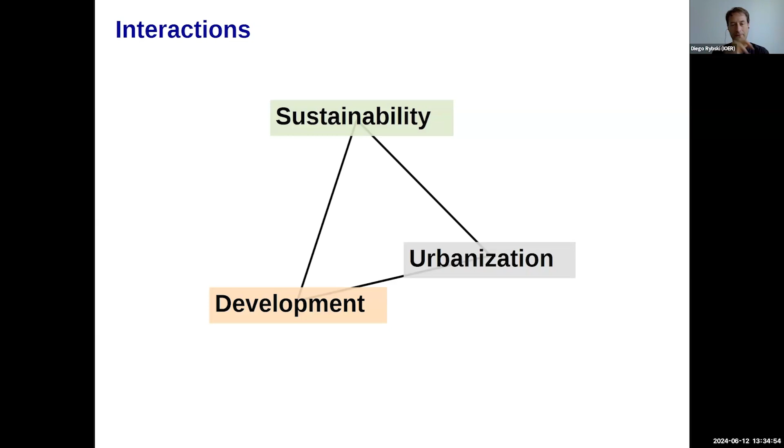Basically we have here three terms. I wrote here sustainability, we have development, and we have urbanization. And so these three are somehow connected.

So there's some connection, and this is a very well-known effect that with ongoing development, more people migrate to the cities, and so urbanization becomes more pronounced.

Then we have between sustainability and development, we have sustainable development goals and sustainable development. And now the question is, what is between sustainability and urbanization? So this is what we are interested in. And this turns out not to be so trivial, so not so clear.

You can talk about urban sustainability as the increase of efficiency, of resource use, optimization. Important dimensions of equity and social justice are sometimes not included. Then there's other concepts, like urban resilience, recovery from disaster events. Urban transformation is large-scale changes in system properties and so on.

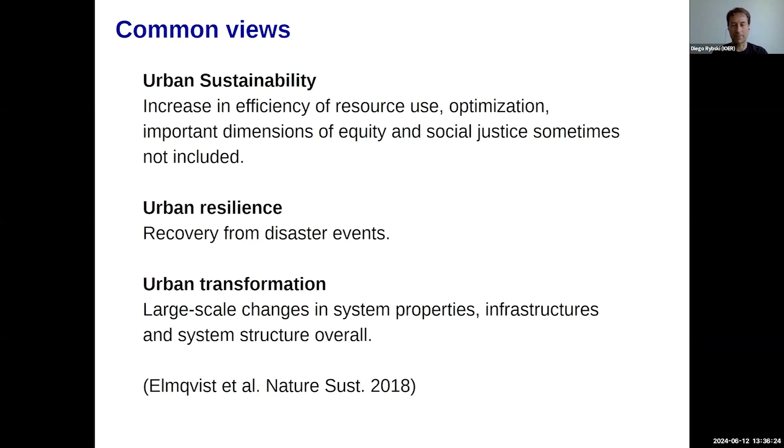So it's not so clear - urban sustainability, sustainable cities, resilient cities, smart cities. There's a very big body of literature from different disciplines, and in my point of view, the concept is challenged because of two points mainly.

The first one is cities are not a closed system. If you look at one city, you still have a lot of flows in and out - people that go in and out, materials like water, energy going in and out, and even air, like temperature. So basically it's an open system, the opposite of a closed system, and actually it's basically only characterized by high density of people and infrastructure, and this high density also attracts the flows.

So this makes it very difficult, and typically one cannot look at an isolated city.

And then the SDG 11, which is dedicated to this, includes many indicators and targets which have an emphasis on development and less so on sustainability.

So cities are not a closed system, they are open, and we have inflows, outflows. And if we take SDG 11, which is about sustainable cities and communities as a standard, we have many indicators which have an emphasis on development - things like convenient access to public transport, and many of them have a local focus, while sustainability is a global issue.

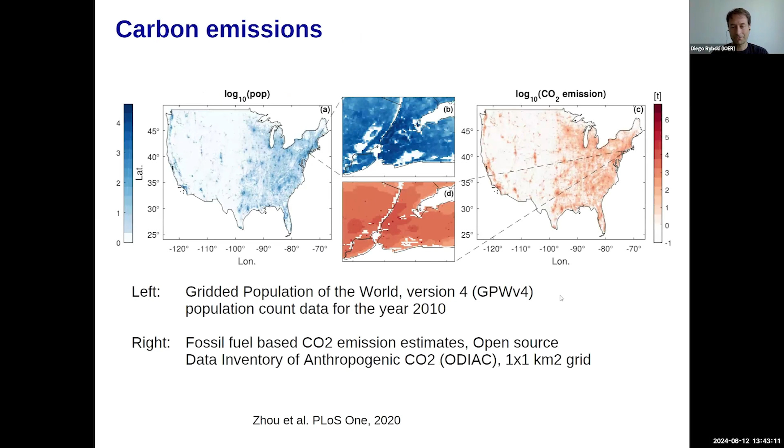And now we wanted to relate them. So this is gridded data - there's a square grid, and for each pixel of this grid there's one value, and we combined them. And how we did this was by so-called Lorenz curves. So this is what we have here in this example.

So basically, we sort the pixels by the population. Let's say you make a long list, and in the list there is each pixel and the population, and we sort it from lowest to highest. So on the left are the pixels with least population, and on the right with most. But then we do it cumulative, so we add it up. We start with a sorted list, and then we add it up. And in the same rank order, we also add up the cumulative carbon emissions.

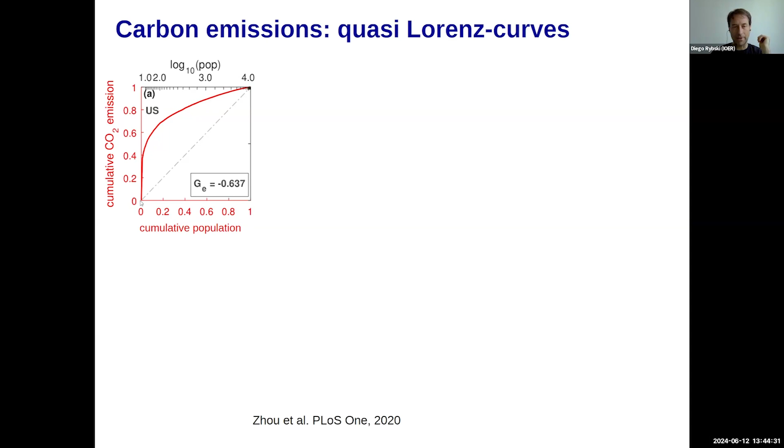So we have this red curve, and this means with very little population, we already have a considerable amount of carbon emissions, and only if we include all population do we reach the total carbon emissions. And this is an example for the US, and we can do this for other countries.

And when we look at UK, it's a similar shape. Brazil is a similar shape. France, it gets a bit flatter. Germany is almost completely straight. China is the opposite direction, Kenya opposite direction, and Uganda opposite direction.

And this means, for example, if we look at Uganda, we can take 20% of the population but have almost still 0% of carbon emissions. And if we take 80% of the population of those least populated pixels, we have not even 20% of the carbon emissions. So only at the end do we have the rest.

And this means that in countries like the US, the carbon emissions happen more in the rural areas and in the less densely populated areas, and in countries like Kenya and Uganda, it's more in the highly populated areas.

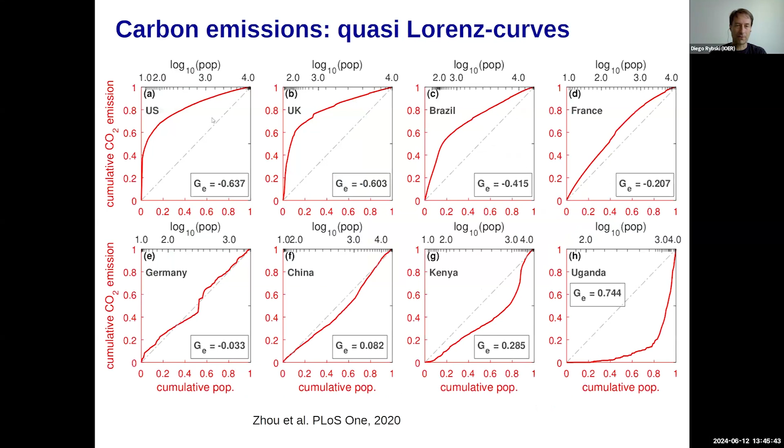And this led us to compare this with the GDP per capita, and we use a Gini coefficient. So basically, the shape of the curve can be characterized by the Gini coefficient, which is often used to measure inequality. And we extended it - usually it goes just in the blue corner, but you can also define it for the green corner. And then when we plot this Gini coefficient as a function of the GDP per capita, we see that there is some correlation.

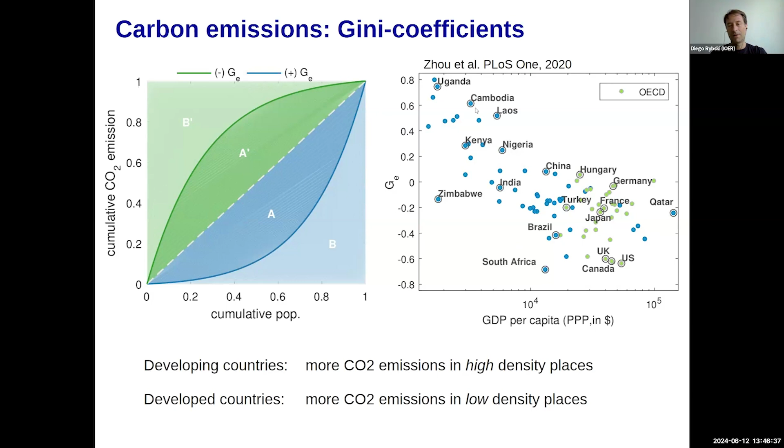So the countries with higher GDP per capita tend to have the curve in one direction, and those with less GDP per capita, it's in the other direction. So this means that in the more developed countries, if you take GDP per capita as a measure of development, the emissions happen more in the less densely populated places, and in the less developed countries, it's in the densely populated areas. And yeah, this is quite interesting, and the question is, why is this? And this is ongoing research.

I want to give a bit of an idea also in the direction of technology. So what is emerging now is 3D printed houses, 3D printed constructions.

So basically the idea is, you know, these 3D printers where you have some plastic which is placed, and you can generate 3D objects. And the idea is to apply this technology to housing. There are different approaches, and several houses have been built.

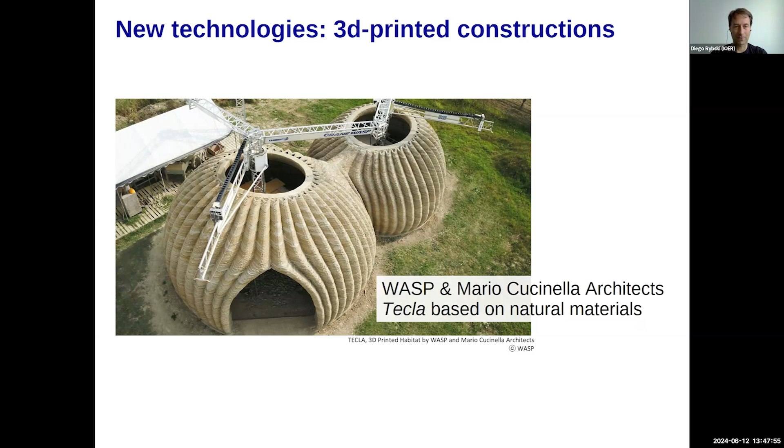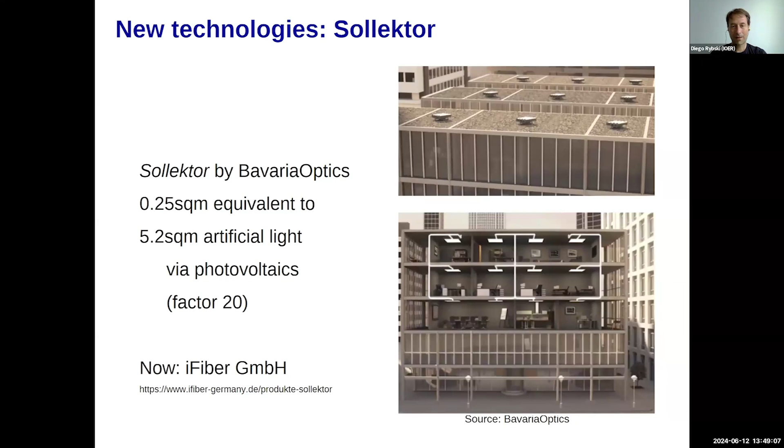Okay, then I would move on to adaptation in cities. I don't know how we're doing in time. Yeah, so I focus here on nature-based solutions.

The idea is, we have climate change, we have climate change impacts, and we're going to expect more natural disasters, floods and heat and these kinds of things. Now the question is, how can cities adapt? Nature-based solutions, as the name says, try to address these problems with nature.

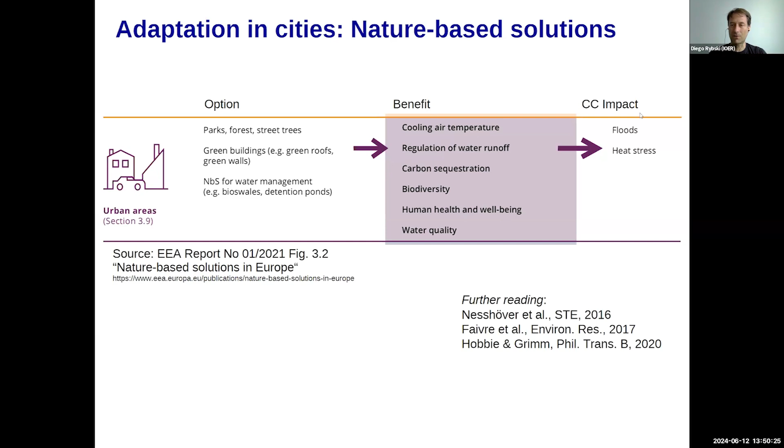The benefits are cooling of air temperature from the trees and vegetation, regulation of water runoff through the bioswales, biodiversity and human health - these are positive aspects. The climate change impacts addressed are mostly floods and heat stress.

These are like bioswales. The idea is that you build next to the street some kind of slopes, like small rivers or a channel next to the street, where the water can flow and infiltrate into the soil.

Otherwise, if everything is sealed, the water goes directly into the canalization, and often if there's a strong rain event, the canalization cannot cope with the amount of water, and then you have flash floods and flooded areas if there's an extreme rain event.

And then you can also have check dams. These are small dams which also benefit or support the infiltration.

It can also be grass and so on, and this can be public green space, so there's a lot of benefits. There's also problems - for example, in the city people throw trash and then you need to collect it, and this is more difficult when you have things like this than when you just take a machine to remove the trash.

Yeah, so this is one of the disadvantages. And then also the vegetation might need some maintenance and so on.

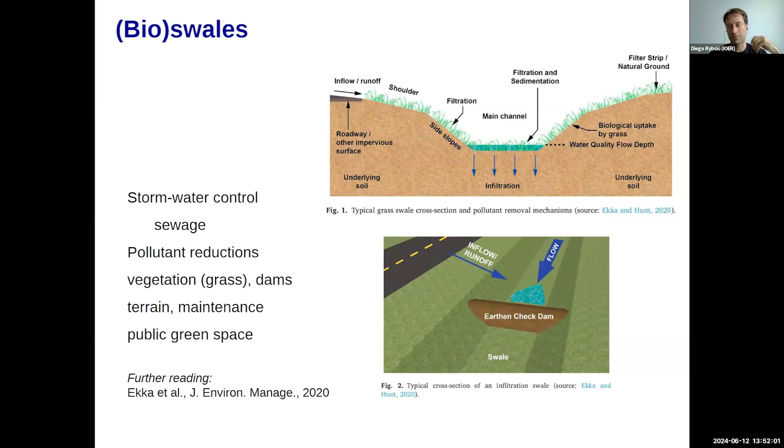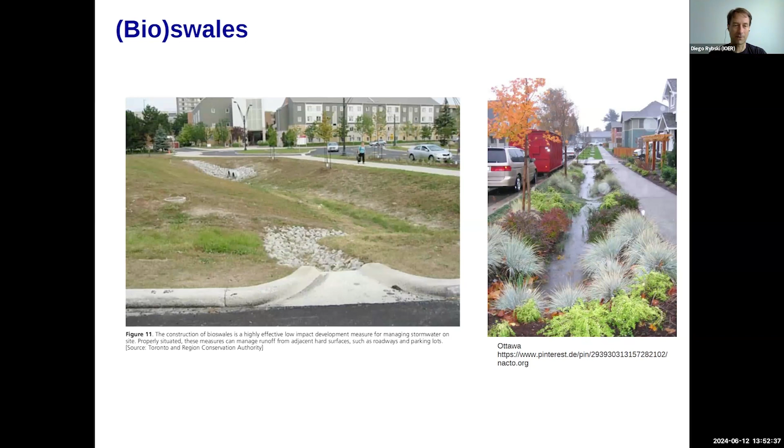And this is an example, from Canada. On the left is more like a retention pond, where the water can accumulate, and instead of flooding the street, you already built some small pond where it can go. So this is the idea. And on the right hand side, you have these swales as I discussed them. Of course, it depends a lot on the conditions in the city, and if you have inclinations you need different things. But this is the basic idea.

Then there are ideas from planning, and I like this figure a lot from Urban Climates, a book by Oke, who works on urban climate. They pose the question: so you have, let's say, 1 hectare, and you have 75 units to be placed on this hectare. Now you can think about the configuration, how to do this. So in the top left we organize them in a high rise, in the middle we have houses in rows, and in the lower right we have more of a disorganized arrangement. And now the question is, what is good, what is bad?

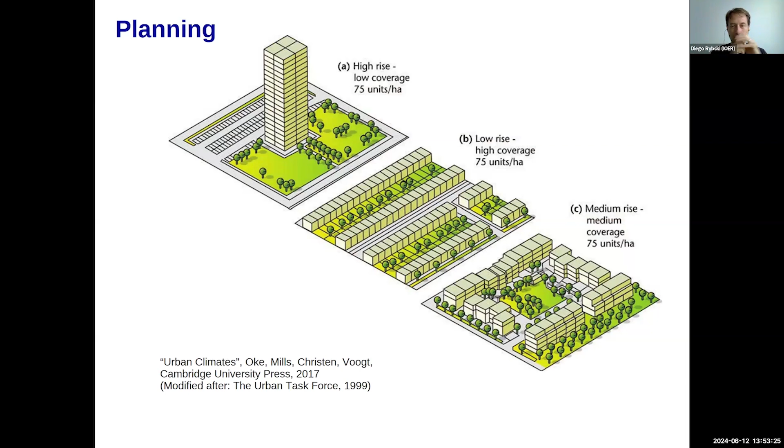And we can, for example, say that with this tall building, we have more surface wind because there's less structure, less roughness, but we have an efficient land use. So on very small land we have a high density, and the space around can be used not only for parking as indicated, but also for vegetation and trees and stuff.

Then similarly, you have these other examples in the row houses. Here everyone has its own garden, and so on. So these are different configurations, and I think it's kind of interesting to think about what is best, in which respect, which goals can be achieved, and so on.

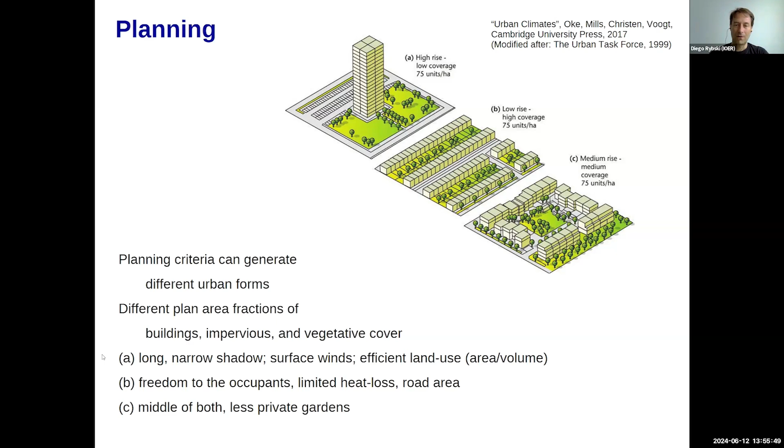And conclusions that can be drawn: there's no single best design that meets all climate objectives. So, as I already indicated, you always need to do compromises. By doing one thing, you will be worse at another objective. And then there can be different strategies that lead to the same objective.

And then what is also important in terms of cities: when you have one design option, later it's hard to change it. In particular, in the bigger planning, you cannot completely demolish a neighborhood. It's very, once the infrastructure is there, it can hardly be changed.

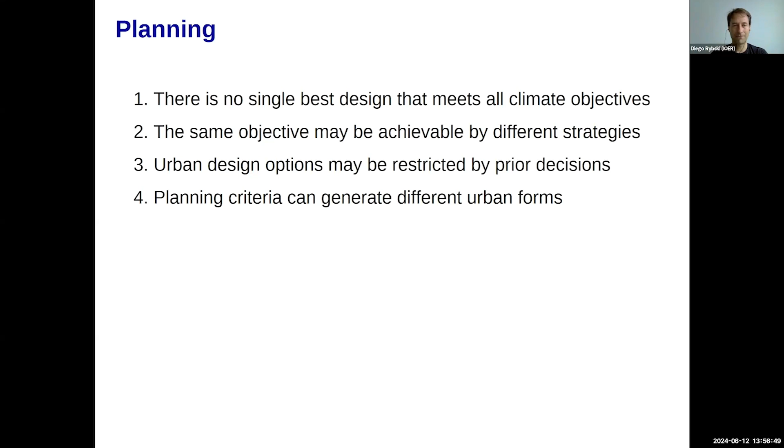Do we have colleagues from Bangkok or so? I didn't ask because in tropical climates, all these things are a bit different.

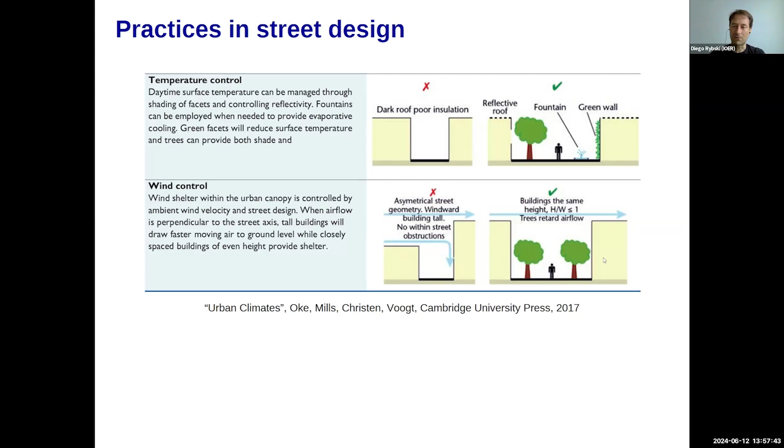Then wind control: they suggest to have buildings of similar height, so that the wind doesn't get stuck in the street canyons. Also street trees. Then the next one, air quality control, this is also clear. Then solar control, so to enable shading, to have arcades, window blinds, solar panels, and these kind of things. Runoff control, so to use green roofs, permeable paving and water storage. And here I need to say that the green roofs might be also kind of competing with photovoltaics.

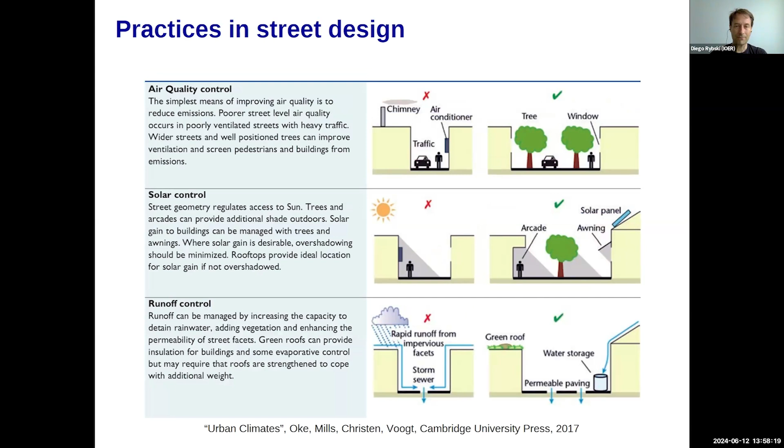Here are examples of green facades. There's a lot of different ways of doing this, and different species of plants. I think that, at least in Europe, there's a rather good understanding of what can be done, and there's actually a nice example in Italy called Bosco Verticale, which looks a bit like this, where they plant really small trees on the balcony, to generate a forested building in a sense. But I guess that in other countries, other places, the vegetation must be, of course, different.

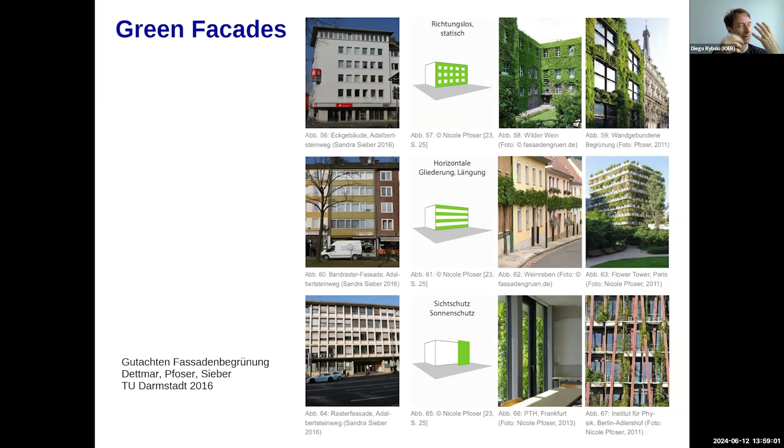As a bit of an epilogue here, two popular developments that I observe: urban green, as I mentioned with the Bosco Verticale, and the other development is car-free cities or super blocks.

And then urban sustainability and sustainable development goal 11. Now I would like to go to some group work.

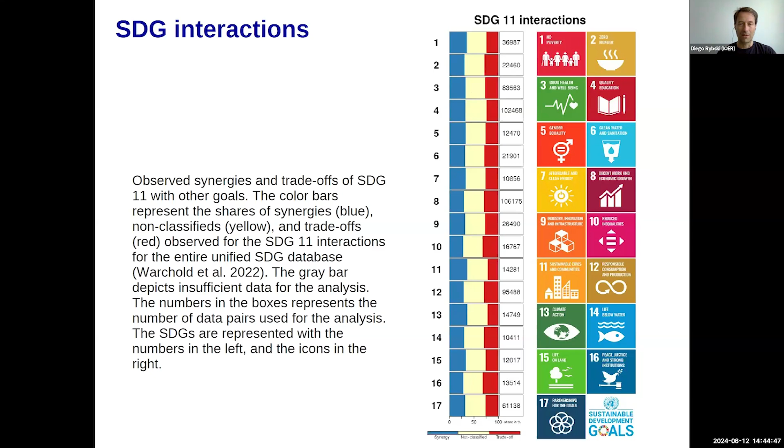Now if we look more into detail at the targets with which SDG 11 interacts, we have positive on top and negative on the bottom, with a different representation. On top we have the synergies: SDG 11.1, about housing, interacts positively with many other targets of other SDGs, and also, less prominently, 11.6, which was pollution and waste. This means that if we address housing and pollution/waste in the cities, we also have benefits with other SDGs — very nice.

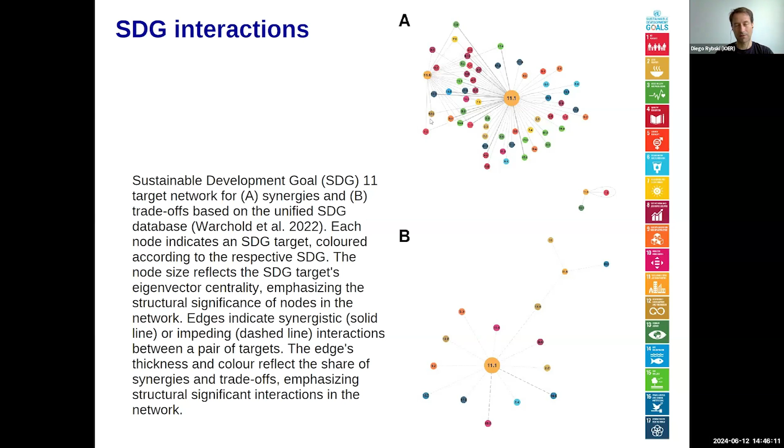And then in the bottom of the picture, we have the negative correlations, the trade-offs. There again we have target 11.1 with a bunch of others from other goals, but this is less pronounced. So the most important are really 11.1 and 11.6, the housing and the waste. With this, I would like to thank you for your attention.